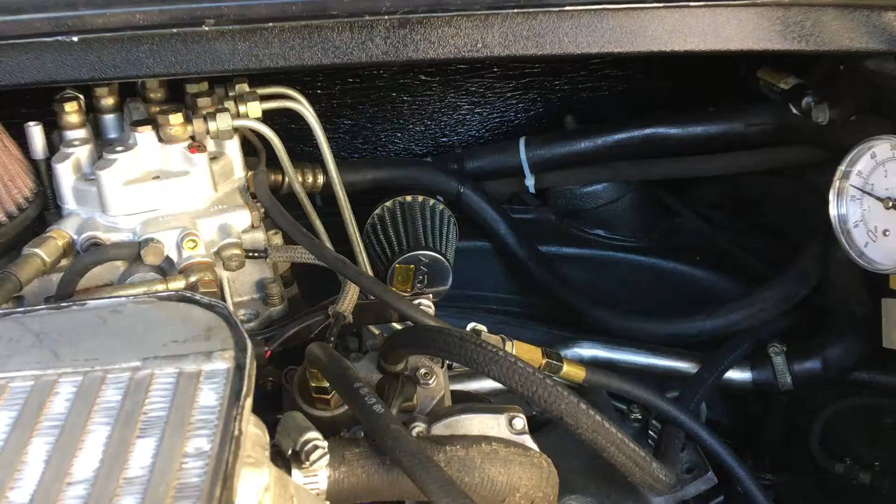Okay, so the first thing we're gonna do is you've got a line that comes from your fuel distributor and it goes down into your warm-up regulator right here. You're gonna unscrew this one from the warm-up regulator, then you're gonna attach this line of your pressure tester to the line coming from the fuel distributor.

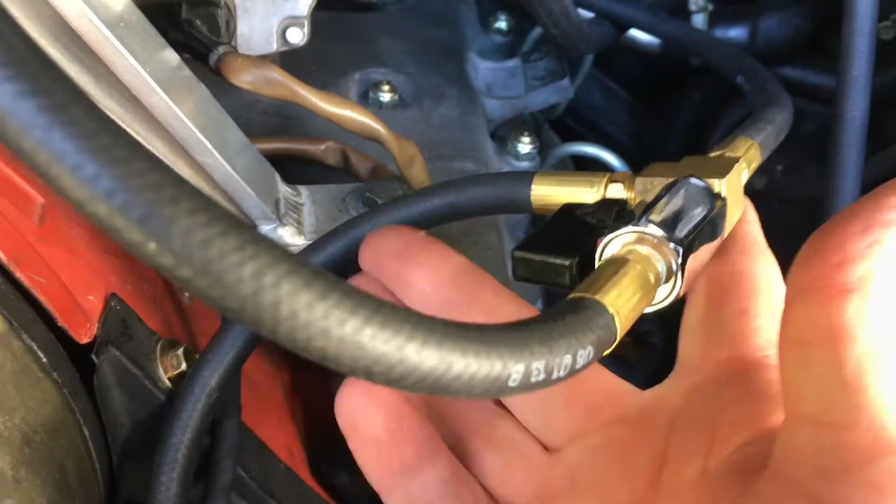Then you'll come to the T junction that you have. This T will go off to the gauge, and this one with the valve on it will go into the warm-up regulator where you took the hose out. Pretty simple setup. You can see the gauge there.

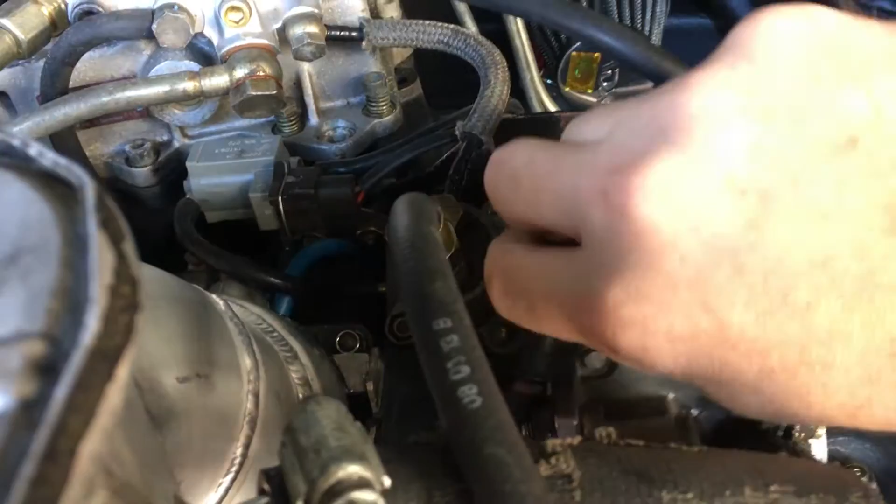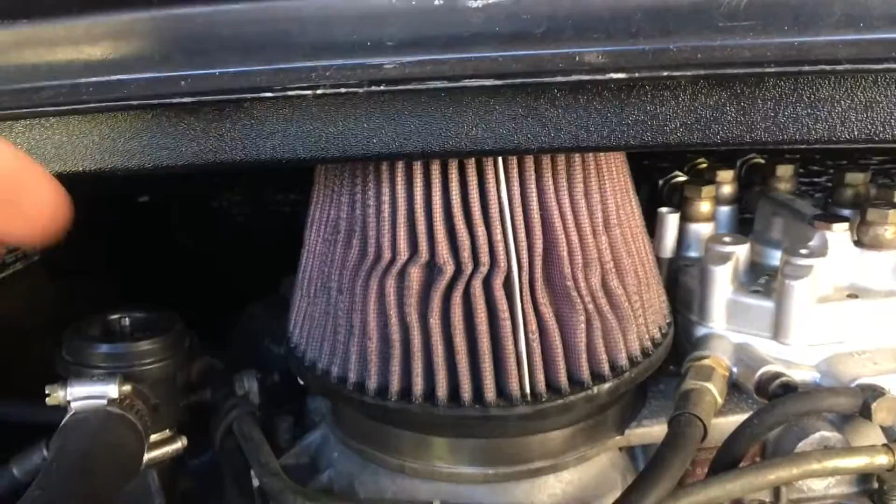So to check cold control pressure, first thing we're going to do is unplug your warm-up regulator. That's what heats it up. Second thing you're going to do is reach around back behind your fuel distributor. There's a greenish teal plug that you unplug. Alright, now you're ready to turn the car on into the on position. Alright, so now that the car's on, you can hear the fuel pumps running.

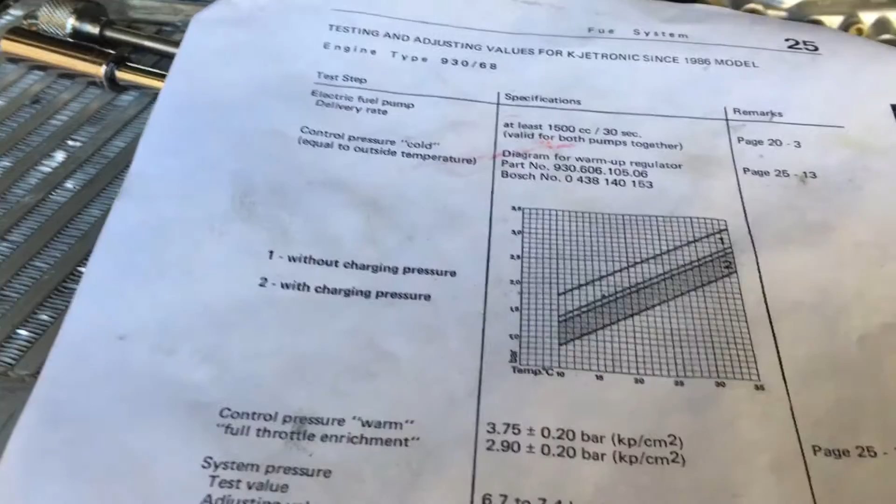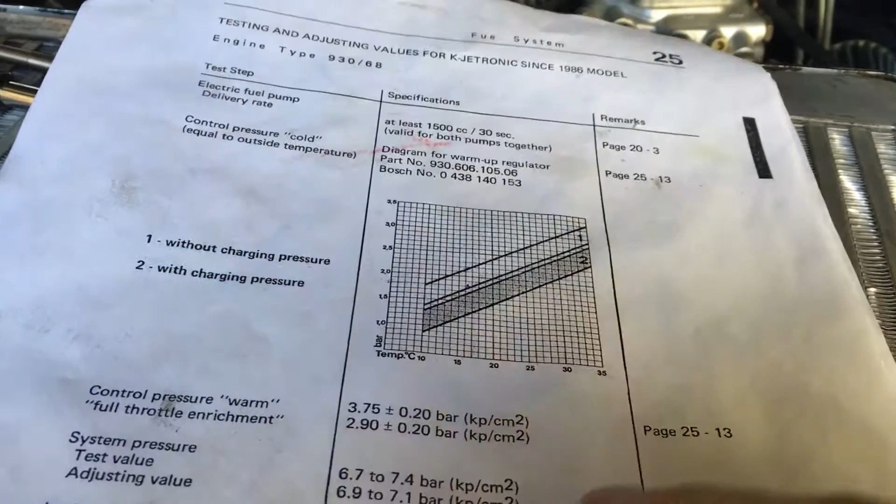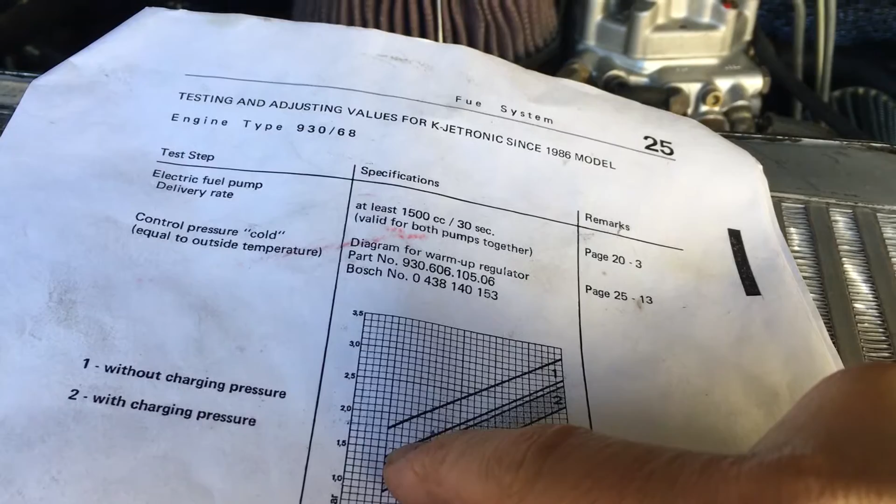So we're going to go to our workshop manual for our specific engine, and you check this chart here to see what your fuel pressure should be. So number one is without charging pressure. Without charging pressure, I'm at about 10 degrees Celsius right now, so I'm looking for about 1.4 to, I don't know, 1.7 bar or so. And when I check my gauge, I am right about at 1.5 bar, so I'm sitting pretty good there.

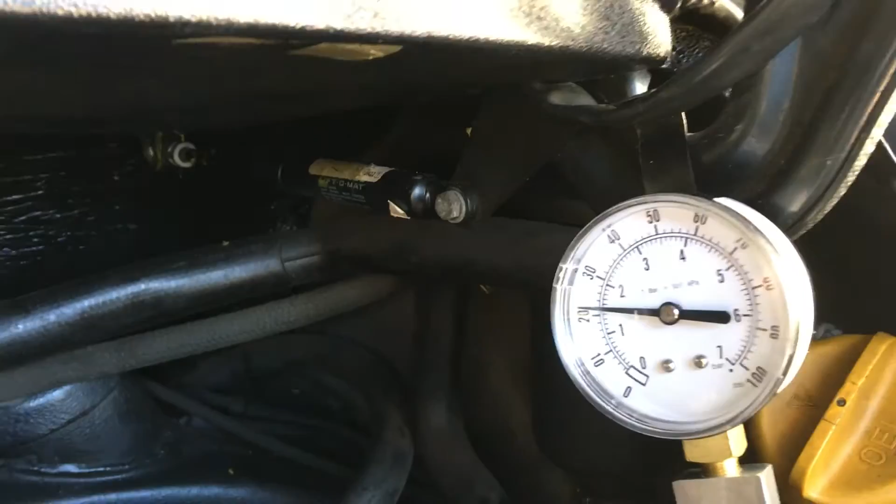The next step that we do is you plug your warm-up regulator back in, give yourself a good 5 to 10 minutes. You're going to see your pressure slowly start to rise as your warm-up regulator gets warmer.

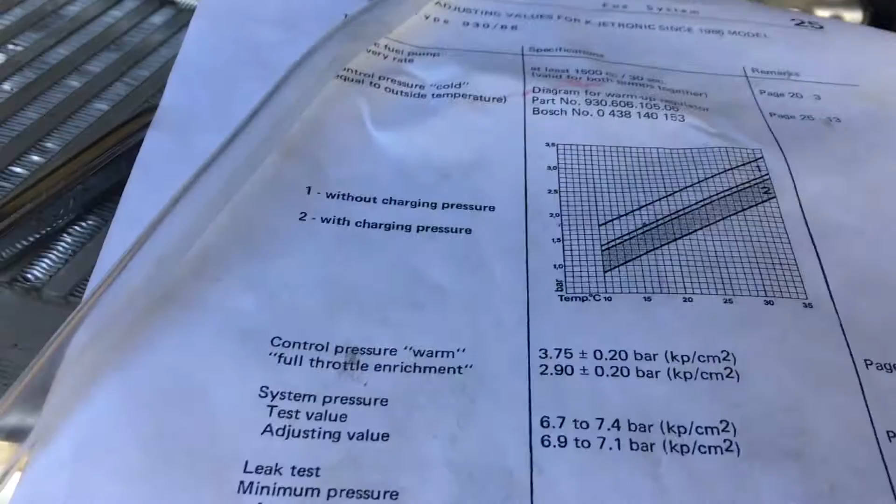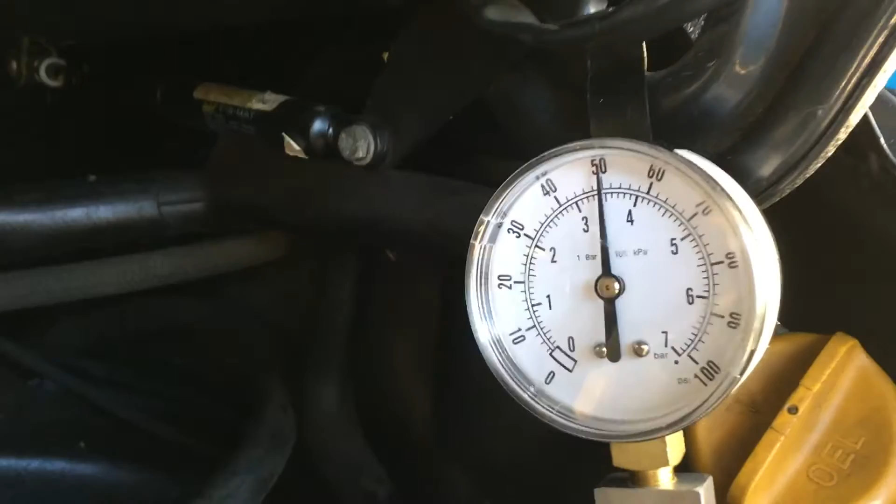Okay, so now I've let my car warm up for a little while, or my warm-up regulator warm up. So now we're going to check control pressure warm. For my particular engine, you get 3.75 plus or minus 0.2 bar. So checking my pressure, it looks like I'm at 3.5 bar. I think that's a good spot for my particular engine.

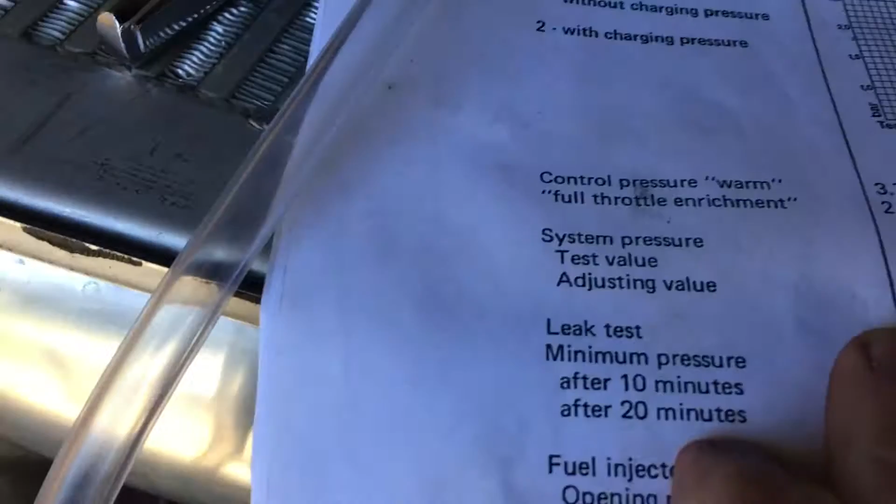So there's two more things we can do. The first is really easy. If you shut off this valve, you're going to get your system pressure, and I've got about 6.75 bar or so on system pressure. I think that's pretty good. We can check here. So system pressure 6.7 to 7.4 bar. I think I'm right in there, so we're okay there.

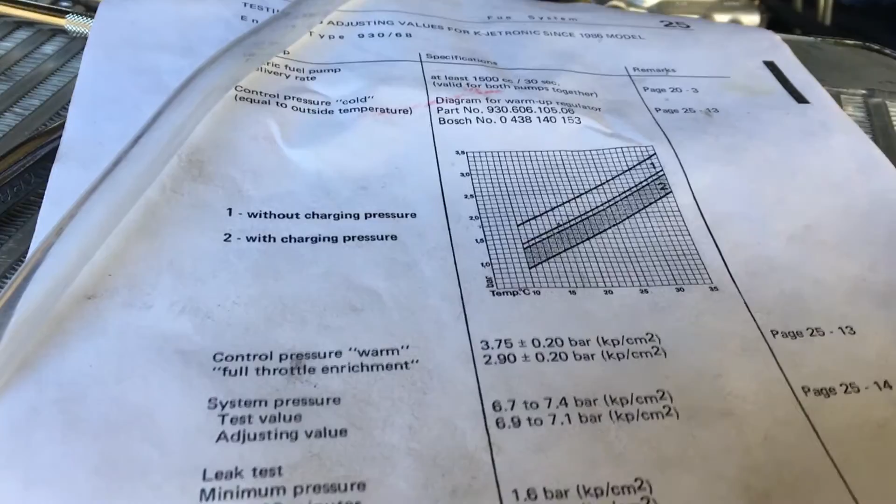And then the last thing we can check is our charging pressure. Again, I'm at 10 degrees Celsius or so. Now I hooked up a pump to my warm-up regulator. You can see the warm-up regulator, and that's the air hose that feeds it. Now I got my pump here, and we'll just watch the gauge as we get up. You can see that drop when we put some pressure in it.

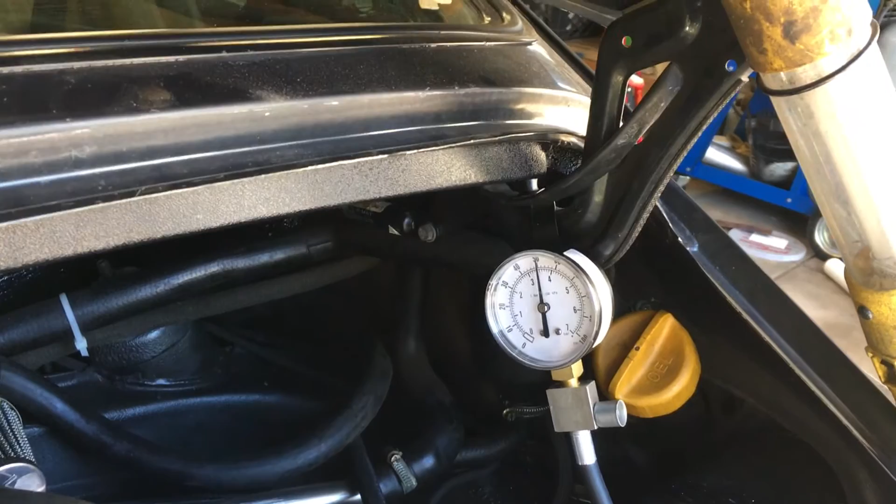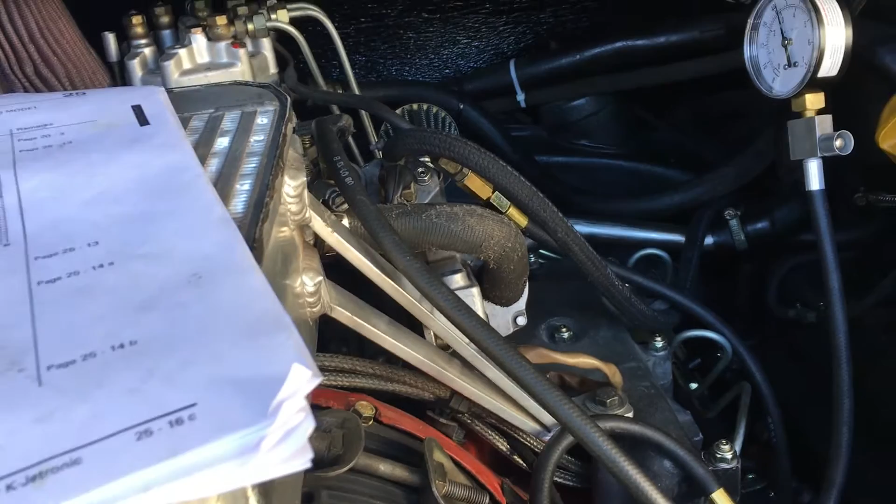So now we've checked all our pressures. We've checked our cold pressure, our warm pressure, our charging pressure, and also our system pressure. So now that we're done, the only thing that we should point out here is that you do have some pretty significant pressure still in these fuel lines. So if you're going to start undoing them right away, you're going to get a good bit of fuel leaking out, so have a little can to catch the fuel that leaks out.

Other than that, I think you're ready to rock and roll. That's the basics of checking your fuel pressures on CIS.